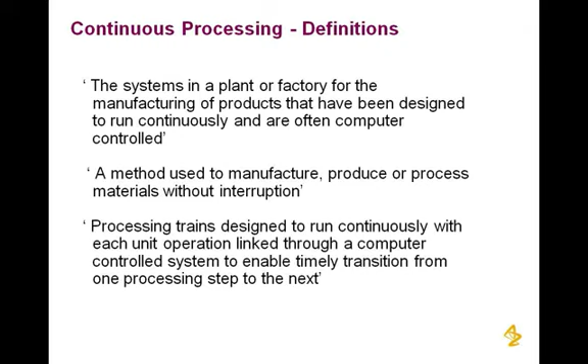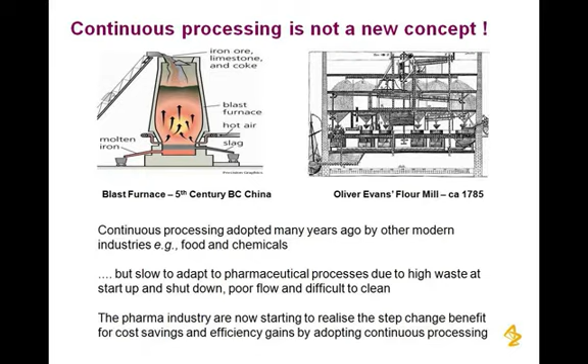The pharmaceutical industry, however, has been much slower off the mark to introduce continuous processing. And there are various reasons for this, but there are, in fact, potential benefits, and there are strong drivers now, and there's a growing interest for introducing it in the future.

One key advantage in an R&D environment is that scaling up from laboratory scale to commercial scale can be achieved by running the process for a longer period of time. This avoids the need to consider changes of equipment geometry and design when scaling up, and therefore could speed up the development time. It also avoids the need to have a range of process trains that operate at different scales. So this obviously reduces the pilot plant footprint and the associated equipment and inventory costs.

Continuous processing provides a really good opportunity for rapid product development and manufacture, and it's possible to apply all the quality by design approaches that use process analytical technologies, or PAT, for advanced process control and data gathering.

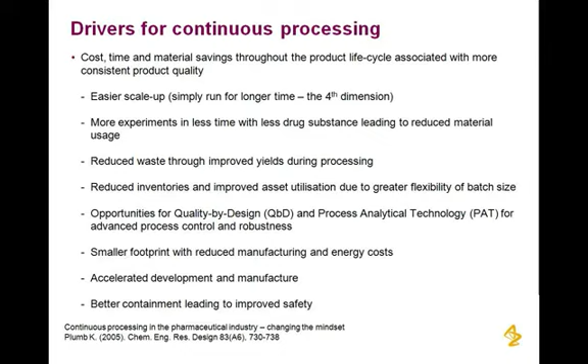The increasing availability and reliability of inline PAT and process control mechanisms are critical for the success of continuous processing in the pharma industry to address both quality and cost concerns. For example, to avoid the need to reject an entire manufacturing campaign because it was not possible to segregate good from bad products in the same campaign.

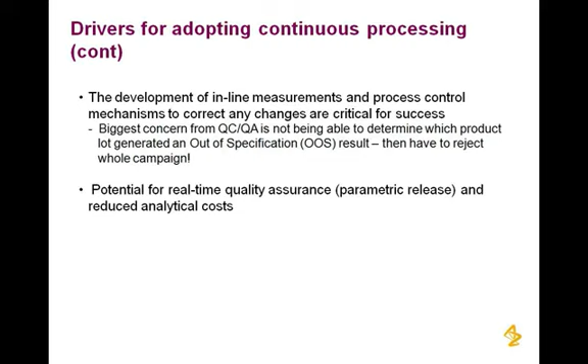And looking at this optimistically, there is a real potential for achieving real-time release with continuous processes and reduced analytical testing and the costs associated with that.

However, there are some perceived and real barriers to adopting continuous processing. Most pharmaceutical companies, like ourselves at AstraZeneca, have a surplus of traditional batch manufacturing assets. So introducing continuous processes can create an investment hurdle to get over. Purchasing new continuous processing equipment has to demonstrate a quick return on investment, or a company would rapidly lose interest in it.

Traditional batch manufacturing is deeply embedded in the pharma industry, and there needs to be a culture change to accept new ways of working. There are also perceived regulatory concerns, largely due to a lack of experience and a fear of the unknown. But there are actually no current regulations or guidance that prohibits the implementation of continuous processing.

In fact, the US FDA have actually been promoting the idea to improve quality and also to fit in with the new incentives for the future. But there is a concern that other regulatory agencies have different attitudes to the FDA, and they may be slower to adopt this way of working. So there is quite a challenge to win the hearts and minds of all the players involved.

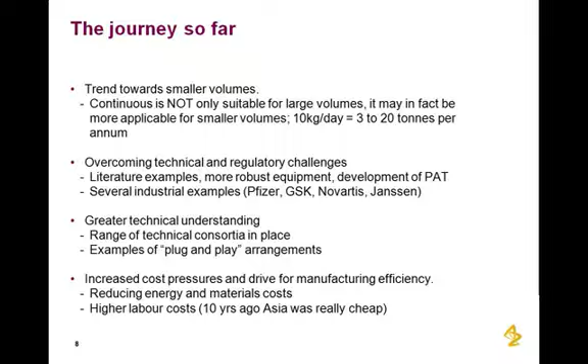And what they've tried to do is build this potentially into a modular platform where you can move between wet granulation and direct compression and dry granulation in the form of roller compaction. So this is something which could be applicable to a number of companies for the development of continuous processes.

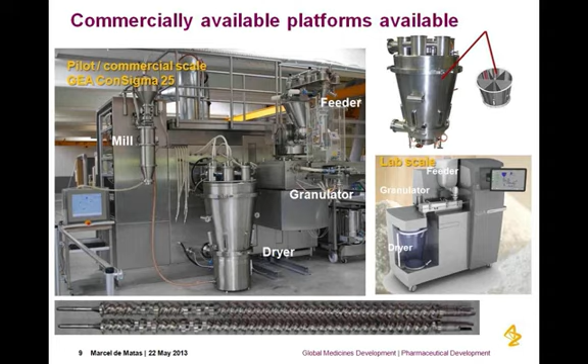So effectively, as material comes off the granulator unit, off the extruder unit, it goes into one segment of the fluid bed dryer, starts to dry, that segment passes round in a carousel type unit, and the next aliquot goes into another segment, and so on. And that allows you to work in a kind of semi-continuous slash continuous fashion.

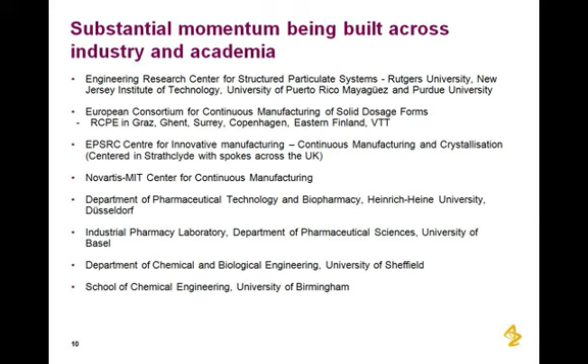So clearly, lots of interest and appetite. There are commercial platforms available which allow people to go and develop dosage forms and bring them to the market. And there are also a number of players out there helping to build better mechanistic insights and a better fundamental understanding of continuous processes and develop the requisite technologies so that we can develop robust processes. And some of these we are currently interacting with and collaborating with, and some not. But nonetheless, there are lists, which I won't go through, of key players across the US and Europe who are involved in this area.

So just to summarise the journey so far, AstraZeneca and many other companies will have had an initial interest in continuous processing over the last decade or so. So our interest dates back to probably the early 2000s, where we started to work with the likes of GEA to look at some of the prototype equipment they were starting to evaluate. What that has subsequently transformed into is investment in development scale equipment to allow us to start evaluating the use of this technology, but also building it into development projects. And that is a substantial stride we've made subsequently.

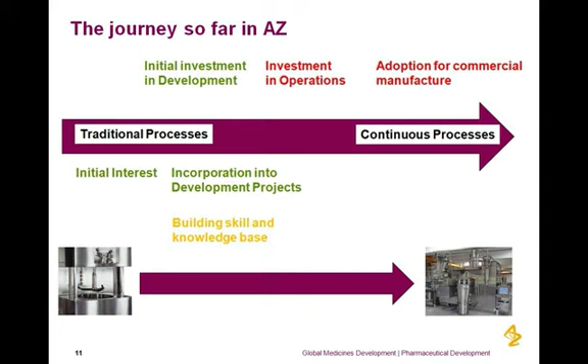And we're doing this in parallel with working with key academic groups to start building our fundamental understanding of these types of technologies. Where we effectively need to go next, if we wish to commercialize products, is to a point where we have this capability available in an operations environment, so we can transfer our commercial products into operations. And then clearly, this is something we then need to make sure we're adopting for all of our products where necessary.

So along the way of starting to implement continuous processing, we've clearly gathered a number of learning points. One of these learning points is that we need to have a quite clear strategy and direction for implementing continuous processing. You cannot do this in isolation. You need to have a long-term view about this, because if you start to do it in development, clearly your operations colleagues need to plan and ensure that they have the capability and assets in-house to deal with it. Now that's quite a difficult situation, particularly as Mark mentioned, where you've already got an existing asset base which works perfectly well. Why would you move towards continuous processing?

And you need to work with these key stakeholders to make that business case clear and make this sort of technical justification clear and start that implementation process. And you can't do it by just jumping full throttle into the adoption of continuous processes. You have to dip your toe in the water to an extent and start to evaluate it, pilot projects, start to generate some of that mechanistic and fundamental understanding, which gives you an understanding of where you would apply this type of technology. And then we can start to apply that learning to projects as quickly as possible.

Clearly what we have to do, we can't do this in isolation. If we want to push it forward, the technology needs to become almost an industry standard, and to do that we need to work with others to make sure that becomes the case. But clearly there's also an influencing role around groups such as health agencies, health authorities, to make sure they have an understanding of when and where we apply them, and they buy into the use of this, what effectively is a reasonably new technology. So there's quite an influencing piece to do, and it has to be done in collaboration with others.

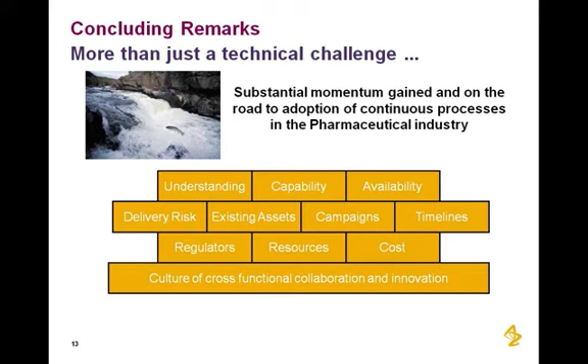Most of all, really, and somebody who's used the terminology in the past, it's around hearts and minds. We have to convince individuals within an organisation who have used certain types of technology forever and a day to start using new technology which has better functionality, which has the potential for us to develop more robust products and to do that more cost effectively. And that's not a simple process. So really it's around collaboration, it's around innovation, but it's around building the right culture. And on that note, this is where we conclude.